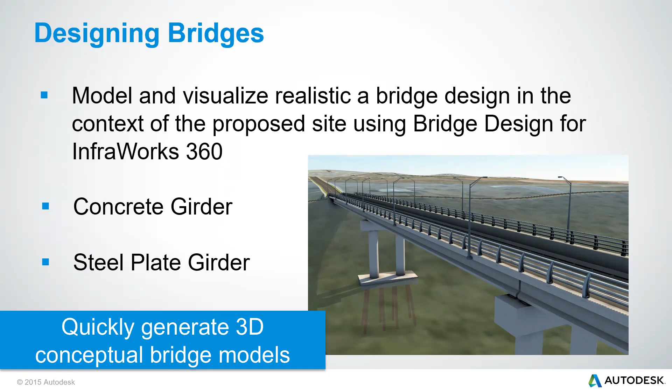You can quickly generate a 3D concept of the bridge with the related structural elements that you want it to have. It is an intelligent way of designing the bridge, where you can easily generate a detailed 3D model based on a typical design that a bridge engineer would want to use, that is the piers, the girders, piles, and even the bearings.

It also allows you to use parametric design, where you bring the power of Autodesk Inventor into your design, to generate and model 3D shapes, particularly where the elements you want to use are not already available within Autodesk InfraWorks.

To edit the bridge is very easy, just a matter of clicking on it and gripping it, and it can automatically adjust. The change that you make on one particular element can easily be applied to any other element that has similar characteristics to the one you are editing.

That is, if you want to model a pier and apply that change to any other pier within that particular bridge model, it's just a matter of selecting and applying, and the shape or property you want will automatically be applied to the remaining piers.

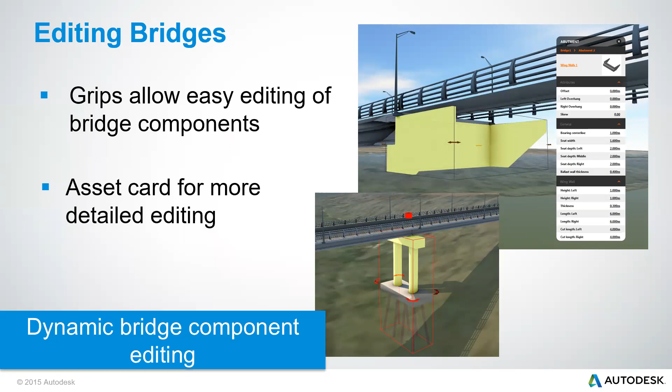You can use the asset card for more detailing and editing of that particular bridge. This makes the modeling of the bridge quite a dynamic way of having it, and very, very easy.

As you model it, you also have to start considering things like the clearance envelope check, that is the overall headroom required, maybe where the bridge crosses over an existing road or railway. It will let you know, for a railway or road crossing, what should be the minimum clearance above that particular existing road.

Once you do that, you can also optimize the design of the bridge using the intelligent tool.

As you do the bridge design, you can also start looking at the quantities required for that particular bridge, just by selecting, and it will tell you the volume of material required for concrete and for steel, both for the bridge overall, but it can also specify for the superstructure, substructure, and that particular element which you have selected.

You can just select view quantities for a girder, one individual girder, or a quantity for the overall girders present on that particular bridge model.

Once you are done modeling the bridge and ensuring the shapes and elements meet the minimum design requirements as per the particular design standard you're using, you can now perform the line girder analysis. Remember that when modeling the bridge, you can also add loads, that is the imposed loads based on the designs you have adopted.

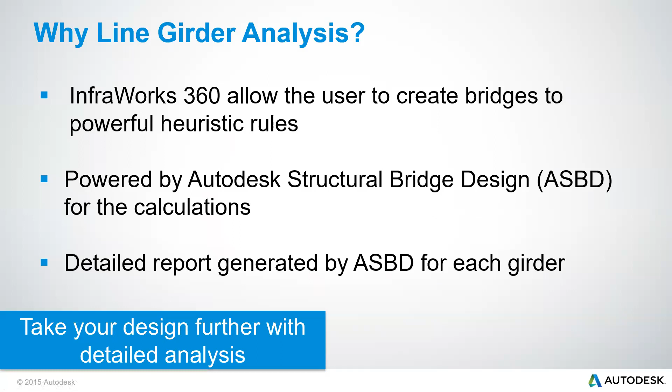So that's just the short presentation on what I intend to do. So I'll now just switch to go into InfraWorks so that we can have a look at how we can do a bridge design.

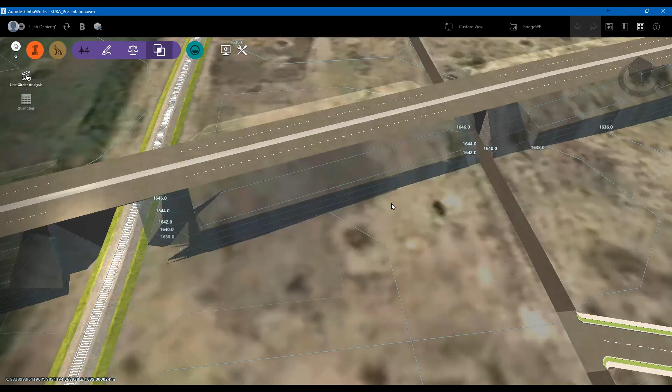So this usually has always been a problem between a structural engineer and a highways engineer, agreeing on the exact bridge model to use in terms of how the bridge geometry will align with the road geometry, that is in terms of the center lines, where you find that during the construction there are usually some discrepancies between the two geometries, especially where the bridge is being constructed by a different contractor from the one which is constructing the road.

To start modeling the bridge is very, very easy. So if it is the road that we intend to do a bridge on, we just need to know, based on the survey that has been conducted out there, where we want the bridge to start and where the bridge will end. So I'll just use some random start and end station for the bridge. Maybe I can choose station 1+675 meters to a particular station of maybe 1+800 meters on the other side. So if this is my intended start of the bridge, I'll just right click.

So I first select the road on which I want the bridge to be done. If I've selected the road, I'll just scroll down after right clicking, and I will see a tool for adding a structure. So there are quite a number of tools that I can add, like I can add a bridge or a tunnel. So in this case, we're only interested in adding a bridge.

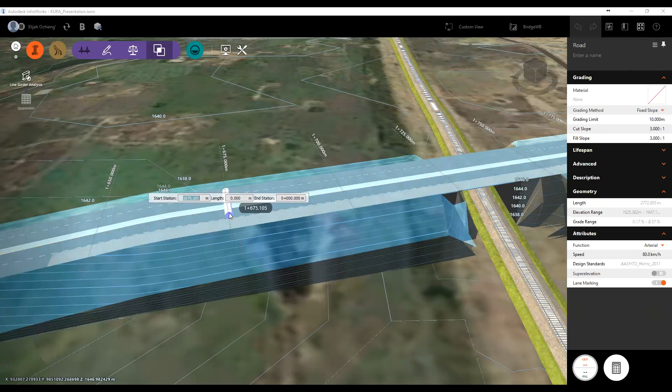And at the end, I will take it towards this other side, maybe at 1+875, so that it can also totally cross over that road there as well. So I'll just click at that particular end of the bridge as well.

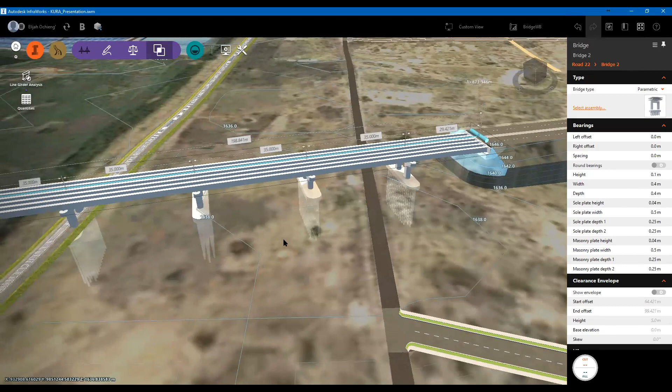So once I've clicked the start and end of the bridge, I'll just give it a few seconds to refresh and synchronize, and it will give me a model of the bridge, as you can see there, with the proposed girders, abutments, piers, piles, and even the bearings, as you can see on your screen. So that's basically what it has given us.

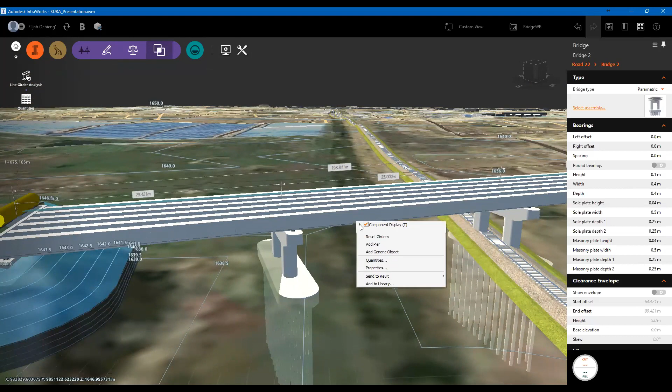It also gives us a deck. Right now I've selected not to display the deck, but I'll just select to show it so that I can have both the deck plus the road on top of it. So it's just a matter of selecting what to display. So I'll select to display both the bridge deck plus the road that is running on top of it.

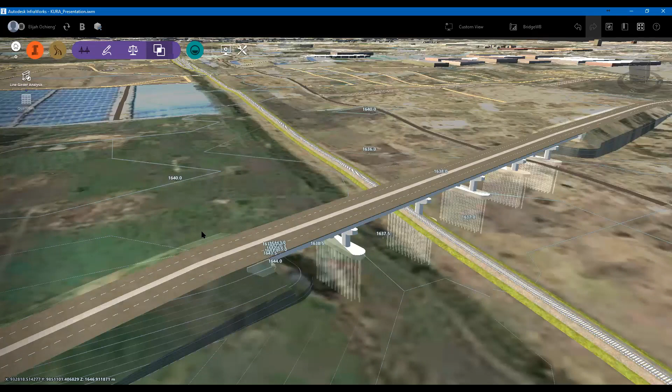So that's how easily I can quickly do a model of the bridge based on the context. So the next thing, after having done it randomly as I've just done it, is to now start controlling the exact start and end of the bridge. So my bridge right now starts at station 1+675.105 meters, but I want it to start precisely at a particular station, like let's say I want it to start at 1660. I'll just type 1660 there and enter.

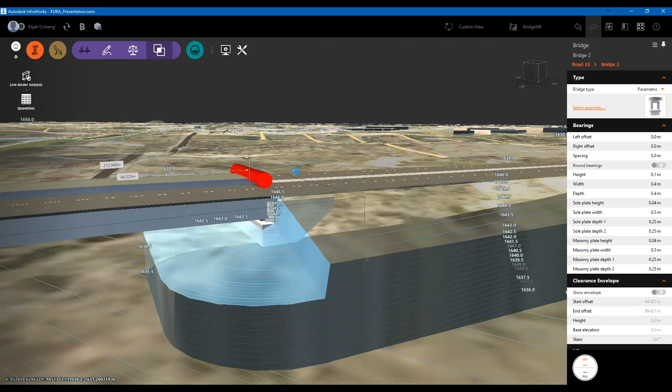So again, it takes a few seconds to synchronize. Then I'll also go to where it ends, to this other side, and also have a precise value for it. So I want my bridge to be 200 meters long. So in that case, I will type this other end to be 1860, because the start was 1660. To have 200 meters long, I will do it at 1860.

So the next thing now, after doing that, is to check which design standard we are using to do this particular bridge. So to check the design standard, it's just a matter of scrolling. And if you scroll down on the right-hand side of the screen, you can see it tells me the attributes. So I can select the attribute, which is the design standard, and precisely the number of piers that you want to use. So if your country uses mainly British standards, that is the BS 5400, you just select it, and it will automatically update the bridge with the minimum design requirements as per British standard.

If you select Eurocode, whether you're using the Eurocode with the UK annexes, or if you're using AASHTO, they are all present here, or even the Australian standard that you can also use. But in this case, I'll illustrate one using the AASHTO load and resistance factor design. That is the AASHTO LRFD.

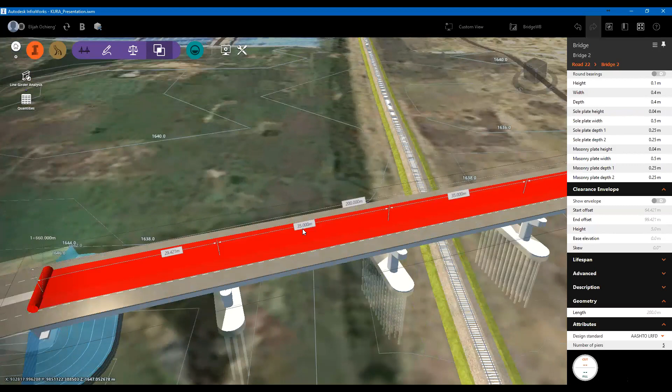So, as you can see right now, it also gives me the minimum spacings, that's the spacing between the piers and between the last piers and the abutment. So right now it tells me that the spacings are 35 meters long. So 35 meters, that will require quite a deep section for the girder. So what we may need to do is to start increasing the number of piers so that we'll be able to reduce the length of the girders, that is the spacing between the adjacent piers.

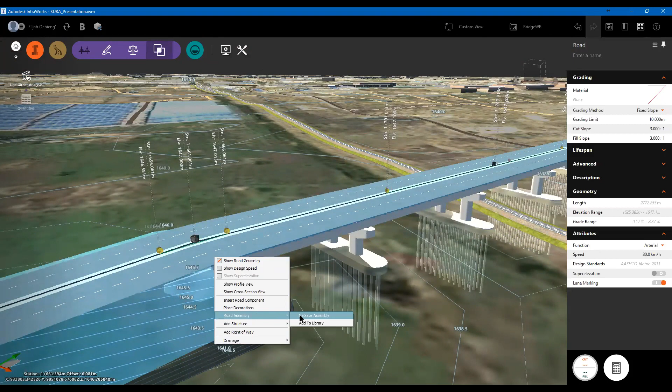Or if there is some proposed road furniture along the bridge, you can just go ahead and add it as well. So I just want to add the guardrails and the lampposts along this particular bridge very fast, just to ensure that we have a complete bridge before I move further. So I'll just right click, and I want to replace a road assembly, to ensure that I have the right assembly at the top of the bridge, the one which includes the lamps, the guardrails, and the footpaths on this particular bridge. So I'll just go here and select. So I want to select a bridge.

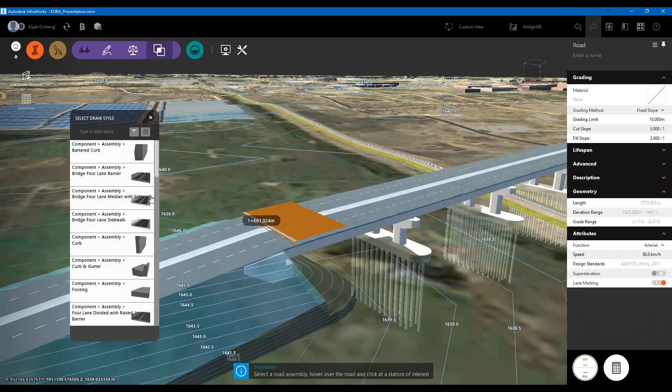So there are already standard road assemblies for the bridge that you can just select, but you are not limited. You can still go ahead and generate your own. As I mentioned, we can use the powerful tool of Inventor to generate our own sectional assemblies as you'd want. So I'll just select a bridge with 4 lanes plus a median with sidewalk. If I select it, I'll just need to select where it starts. So I want it to start some distance from here, maybe 10 meters from the start of the bridge. So therefore, I make it 1650.

That's at the start. Then I'll go to the end and make it end some 10 meters after the end of the bridge. That will be 1870. So I'll just confirm, because I intend my bridge to be 200 meters. So the carriageway with the different road furniture that we require for the bridge should be about 220 meters long. So let me just check on this, and I will drag it to the end where the bridge ends. So the bridge is ending on this opposite side.

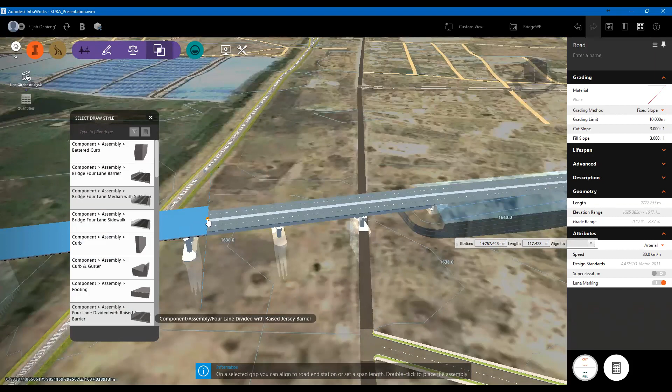So I will type for it 1870 and I will enter. So if I enter, you can see it tells me that for the length on which I intend to provide the different structures should be 220. So if I enter, it takes some few seconds again to synchronize. And it should now give us all the elements that we require for that particular component of the road where the bridge has been inserted.

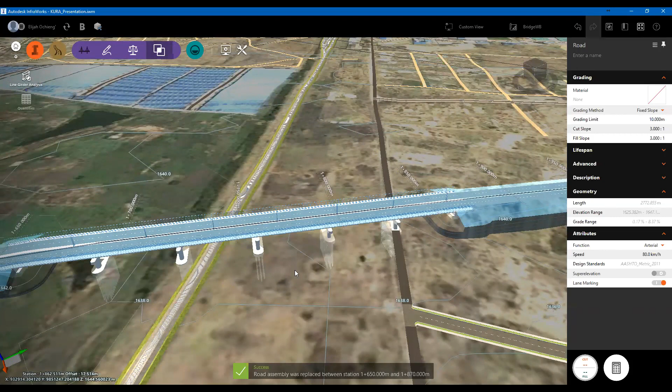So I can just zoom into it, have a look. So my road here, there's quite a steep slope at this particular area though, but if it's a detailed design, you have to ensure that you have the right elevations at the start and end of the bridge. So that's how we can easily change and include the guardrails, the fences, even if I want to introduce a fence just for safety measures, you can easily do that.

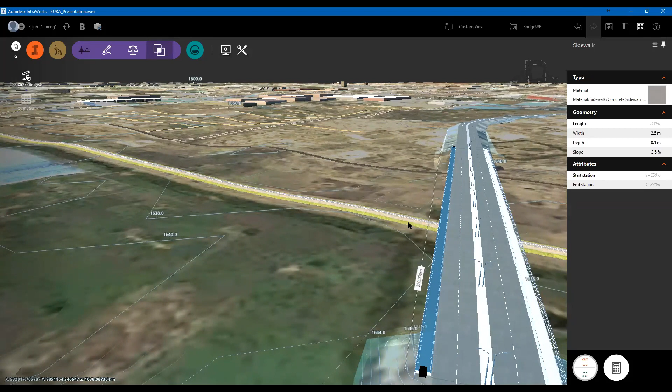So even if I want to now control the length of the footpath that I'm having, the walkways, the width, the depth, the slopes, you can easily do that for that particular bridge. And most important to note is that the slope of the bridge will be guided by the slope of the road in many cases. So even if it's a road which is having a super elevation, if you apply a super elevation to the road, the bridge will also automatically adjust, take up the slope based on that super elevation that you are having.

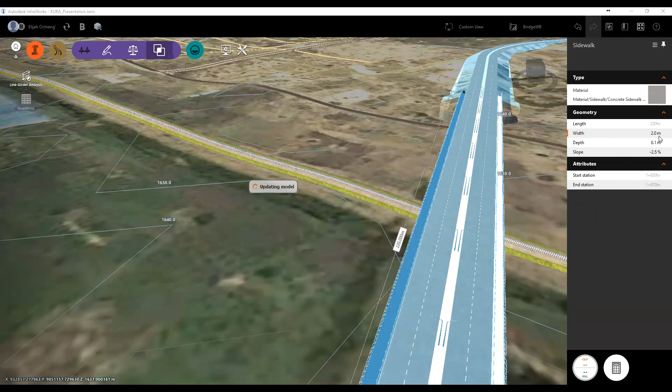So if I want to have a walkway of let's say 2 meters, I just type 2 meters on the width and enter. Then after entering, it just takes a few seconds to again synchronize the change. Then I can also do the same on this other side. So that's basically how you can model and vary the different components of the bridge that you are now having.

So the next thing you can now check maybe is the load that is automatically applied based on the AASHTO that you are having and the class of the road that this bridge is carrying. To check on that, you just go down and select the deck of the bridge. So I want to select the deck, bridge deck. Just go into that position and you can see it tells me this is the deck that I've selected, and it tells me that my deck will be done with a cast in place concrete. It tells me thickness of the deck, the edge thickness. If there are tapered ends of the deck, it also gives me all those parameters.

But what is important down here, it tells me strength of the concrete that is used to do that particular deck as well. So it tells me that the concrete is of class 35 Newton per millimeter square. Then the superimposed load based on the AASHTO that I'm using is 3.0 kilonewton per meter square. Then the wearing surface also, it has applied a thickness of 0.05, that's like 50 millimeters. Even if I have haunches on my bridge, I can also automatically check on this.

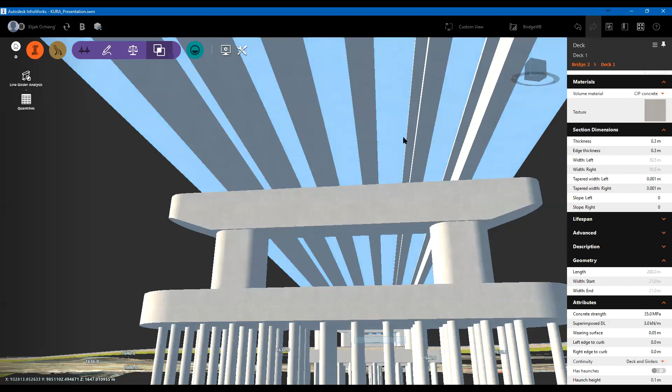Then the continuity of the deck is a very, very important factor. It defines how the supports will be applied, whether you want to support the deck on the piers or just going to be one continuous deck. So in this case, the default one is deck and girders being continuous, which means that at the point where the deck slab meets with the girder, it is going to be one continuous structure. And that full continuity arrangement just ensures that during the in situ construction of the deck, you will have to apply some diaphragm over the piers when the bridge is now being constructed. So that's basically how you can control what you have on the deck of the bridge.

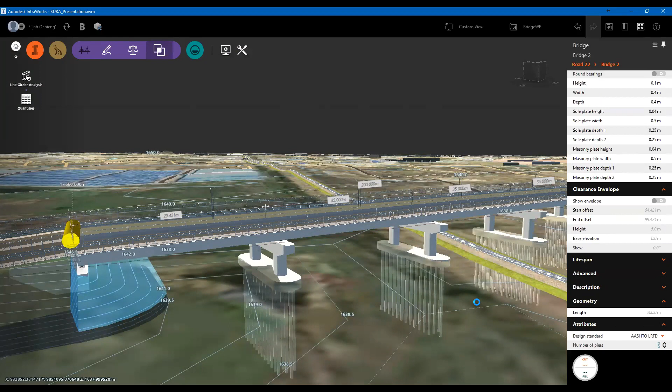So the next thing which maybe you can look at when generating our model still is the exact position and spacings of our girders. So like I said, they are currently spaced at 35, which is quite long and will result in very large and deep sections. So what I may need to do, I'll just increase the number of piers to 7, or let me just use 8, so that we can have a value of less than 25 as the spacing between them. So if I increase the number of piers again, it automatically synchronizes and takes a few seconds.

And when I now check on them, it tells me that the spacing between each of them is 21.87 as opposed to 35. And therefore, that is a good value that you can use, because our sections for the girders won't be that deep now. So the next thing now is we want to control even the length of the column on the pier.

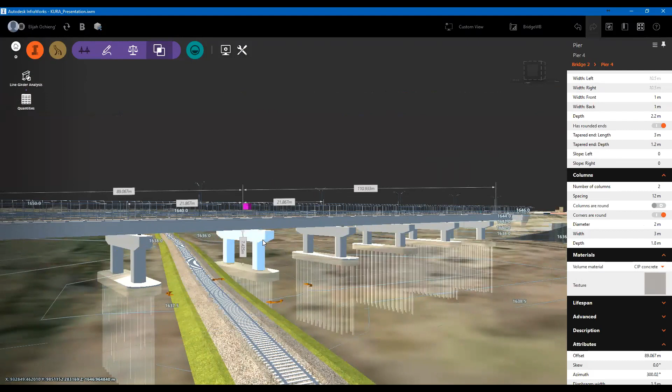It's just a matter of selecting one of them and working on it. So maybe where we are here, we do not foresee use of piles, but the default pier here has piles. So what I may need to do, I'll just select that particular bearing and the pile there, and check on my right-hand tool here. That's the asset card, where I can manage the assets that I'm having.

I do not want to use piles, so I'll just make the number of piles 0 in each of them. But again, whether to use piles or not is informed by the geotechnical investigation on the project area. So I just want to make everything 0, so that I will not be having piles on my model.

Then maybe you'll assume that the hard rock was found some distance below the ground, say 2 meters deep. So I'll just say that the height below the ground for this particular foundation should be 2 meters. So I'll just type 2 and enter. And if I enter again, it automatically synchronizes and changes. That automatically means that the height of the column will also increase.

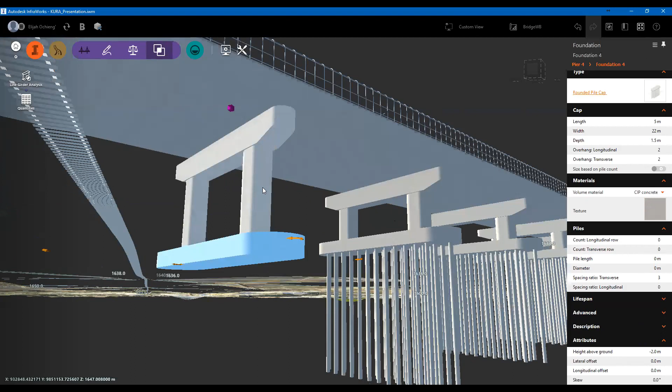Then the next thing is, based on the size of the road that we are having, we may find that the columns are likely to have a greater spacing. Right now, if I check, it tells me that my columns are spaced at 12 meters wide. So I'll just increase the number of columns. As opposed to using 2 of them, I can use 3, and I will enter. Then it automatically changes, and you can see I'm now having 3 columns there.

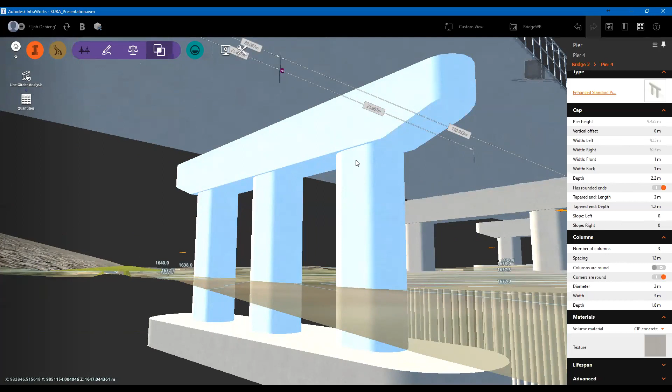So you can go ahead and change each of the elements one by one until you have the exact project model that you'd want based on the design intent. I do not need to do it in all these individual elements for the piers. If I want all of them to take the shape of what I've just done with this particular one, I'll just right click and apply to all piers. We can see they have updated, all my piers are having 3 columns.

Next, since I do not want to use piles, I'll again right click and apply the pier foundation to all other piers in the model. That's how easily you can use it to model the bridge. And as you model it, it's being modeled as per the design standard that you had selected. So you can see right now I only have the piers plus the foundation, no piles.

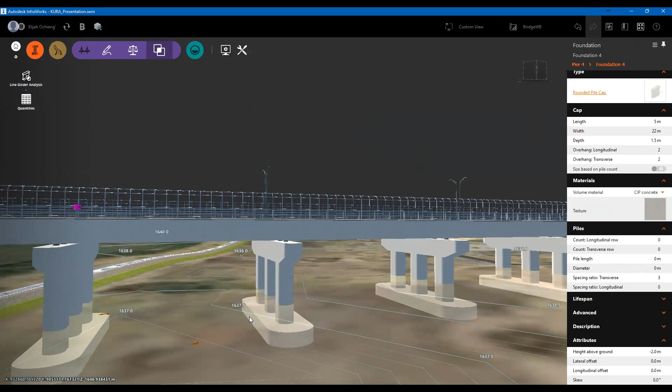The last thing to look at is the girders, which again are guided by the design standard that you chose, because each design standard has its own proposed sections and sizes of the girders. Since I'm using AASHTO, it has automatically selected the AASHTO sections based on the size of the bridge and the spacing of the piers that will be able to accommodate the load that's going to be applied on it.

If I select one girder, it tells me the material properties: the final strength after 28 days will be 55, that's the class 55 concrete. The strength at transfer, that's when you're doing pre-stressing, because it is going to be a pretensioned girder, will be 40. The tendon strength is proposed to be 1860, and the initial pre-stress is at 75%. So it gives you such details based on the particular design standard that you have selected.

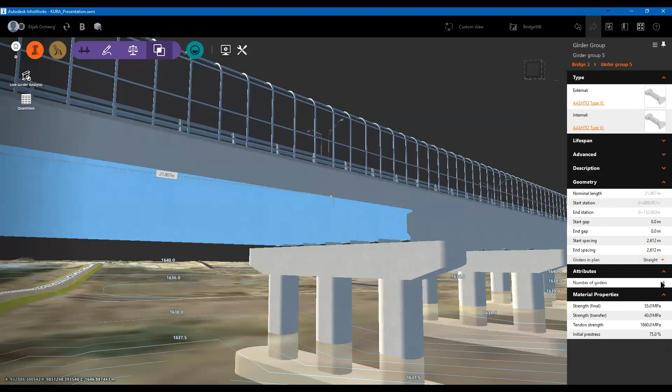So if I want to increase the number of girders based on the carriageway width, I can increase them so that I will not overload each of them. The only thing I need to do is, maybe I want to use 7, I want to use 8 for this. I'll just click and enter.

And it increases the number of them to 8. So the next thing is now to decide on which exact girder I want to use. And again, the choice of this type of girder to use is informed by the spacing, where if they're closely spaced, you can use a lower class or a lower type of girder. So in this case, usually for a spacing of 20 to 30, it's recommended that for AASHTO you can use type 4, or between type 4 to type 6.

So as you can see, the types are all available there. Right now, I've only filtered for it to show me the girders as per AASHTO. But there are quite a number of them. If I just remove the filter, you can see it populates itself, and it has quite a library of different design standard girders. Even if you want to use a box girder, they're all present there, just a matter of selecting. So if I'm only interested in AASHTO, I'll just type AASHTO there, and it filters to display only the ones for AASHTO.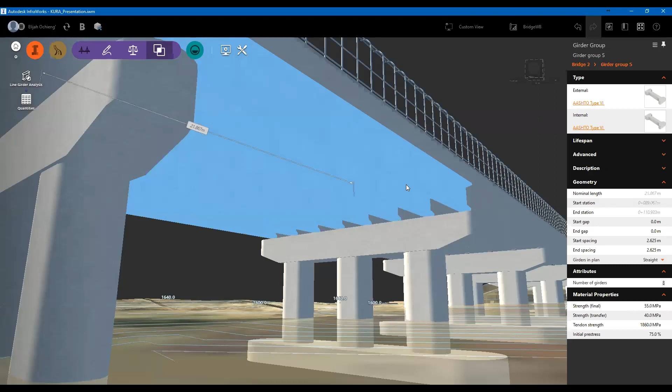So like I said, in this case, we have a spacing between the piers of 20 to 30. So I'll just go for type 6. And if I select type 6, it automatically selects. If I want the property I've selected for these girders to apply to any other girder within the model, I just select and apply to all other girder groups within the model. So that's how easily you model the bridge, as per the design standard that you are using, whether AASHTO, the British standard, and what have you. So right now, that's our bridge.

So the next thing, if you are wondering how you can control the exact location of each pier, it's just a matter of clicking on one pier. As you click, it gives you a way of controlling the offset. You can see that right now, the spacing between them is 21.867. So I just identify the start. It is starting from this abutment. If I select this one here, I can control the exact distance, center to center, between the abutment and the first pier. So if I want it to be 24 meters, I'll just type 24 and enter, and it will readjust itself. Even if it is a skewed bridge, you just need to select the angle to which it is skewed and change the orientation.

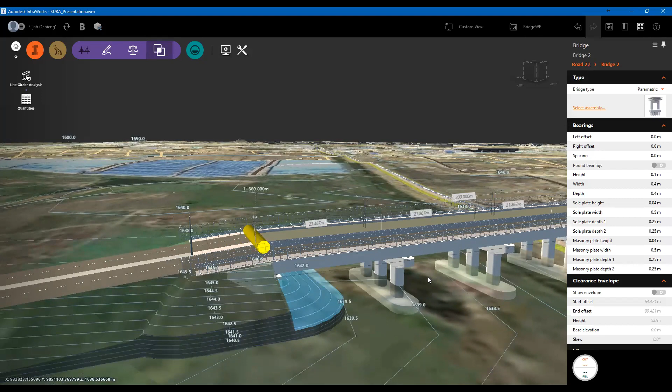The same thing which I've done with the piers, girders, and the foundation is also applicable to the abutment. So I just need to check on that particular abutment here. I'll select it. I need to go below the ground because of my abutment, this is it. If I select the bridge, then the abutment, I can again choose from a library of abutments that are already present. You can choose an abutment with caps plus piles, just a simple abutment, or abutment plus wings. In this case, I'm using abutment plus wings. To change the size and parameters, such as which concrete to use, whether precast, cast in place, or steel, it's just a matter of selecting from what's already present on your asset card on the right.

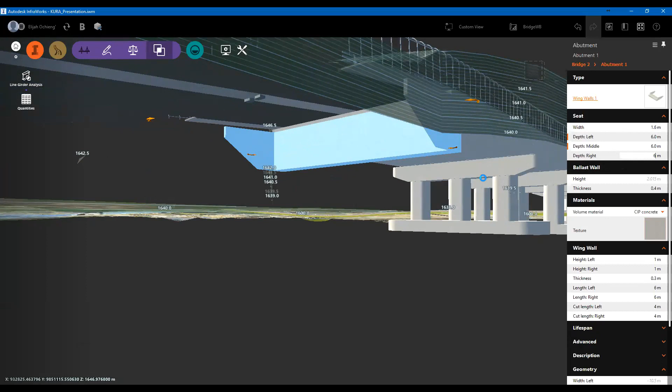So I want it to have a depth of, let's say, 6 meters based on the height of the next adjacent pier. I'll type 6 for right, left, and center, and enter. It automatically adjusts itself. And now you can see it goes down almost the same height as the piers next to it. So I'll just apply that to the next abutment. Okay. So that is it with the modeling of the bridge.

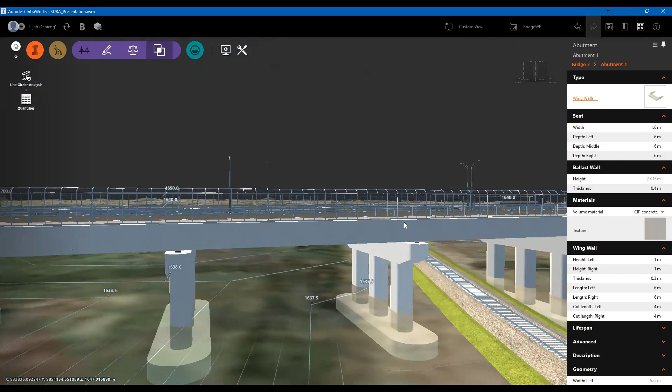So you can see the modeling of the bridge is very, very easy. As opposed to modeling from scratch without the required sectional properties and materials, which would take you forever if done manually, here we model it by just picking from different elements. I was mentioning that you may find you want to use some specific sectional sizes, pier sizes, and types which may not be present in Autodesk InfraWorks. What you need to do is just open Autodesk Inventor. I will quickly illustrate how you can create your own custom shapes using Autodesk Inventor. So I will run Inventor and share my screen for a second.

I want to illustrate how you can easily do this. Let me share Autodesk Inventor. I've just run it. Let's assume you want to create a particular shape. I'll illustrate with one I was already working on, let me just open it.

Confirm to me that you can see my Autodesk Inventor screen. I'm running up a sketch I was making for my required pier. As opposed to using the rounded pier columns, I can just go and sketch this kind, let me just open it, give it a few seconds.

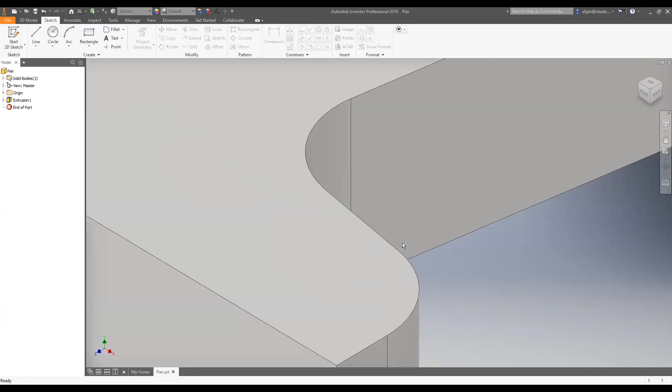Just a minute, I want to go to the sketch, then the 3D model. Let me show how to create a new sketch. What I'll do is go to the origin and select the plane I want to work on, then switch the view by changing the orientation.

Unfortunately, what I want to show is not picking up. Let me just start a new one so I can show you what I intend to show you, by creating a new parametric shape.

Once I've gone to new, I'll select the origin I want to work on, and use that origin to do a new sketch. To do a new sketch is very, very easy. I just want to start by doing a line from here, maybe for 4,000.

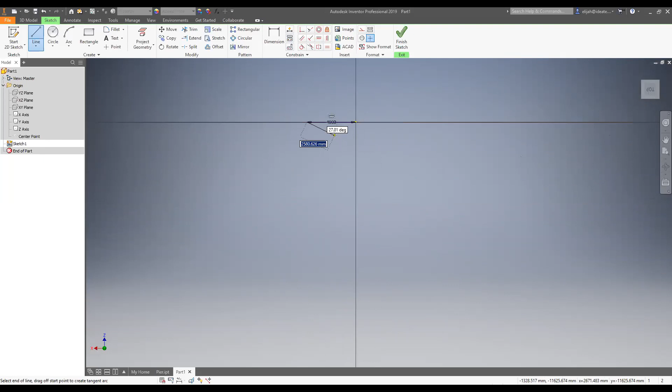I want to create a typical pier as opposed to what I'm having in InfraWorks. I want to create a parametric shape here for a typical pier that one would want to create from a custom section. I want to do it from 4 meters from the center, then form the shape of just one continuous pier with a widening top so it will automatically support the girders on it.

At this particular point, I want it to slope at, let's say, 75 degrees. I won't go precise, maybe approximately 75 degrees. And I want it to have a height of 9,000, or 9 meters.

Let me go back to the screen. XZ, please. Okay, that does not work for me. Sometimes using this Inventor, which is mainly for mechanical models, trying to use it this way may bring you issues.

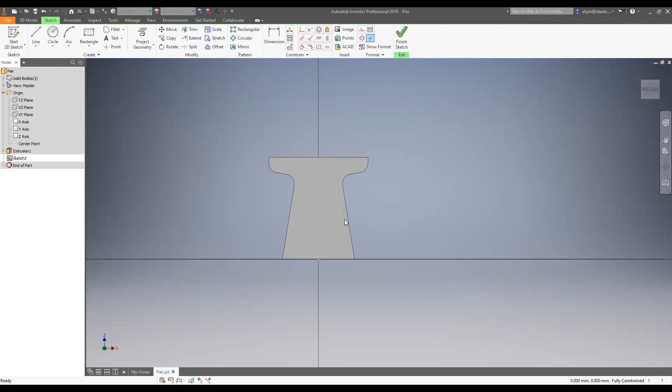But basically what I wanted to do was show how we can create a shape like this, as opposed to using the circular individual columns we apply through the foundation. We can use it to create this kind of model, which we then export into Autodesk InfraWorks. As you export into InfraWorks, it comes with the shapes, and it will be parametric, meaning if you change the height, it automatically adapts and takes the height you are trying to change, the length, the dimension, any dimension you come up with from here, just by sending it.

When you click finish, you can send it and go back into InfraWorks to access and import it among the different elements you have. So that was just to illustrate that, as opposed to using the default shapes and parameters you have, you can go ahead and define your own. That's why you link up Autodesk InfraWorks plus Autodesk Inventor, Inventor just for modeling and creating different shapes that you would want to have.

Okay, so I'll just go back again to share a new screen, that is InfraWorks, so we can continue with it.

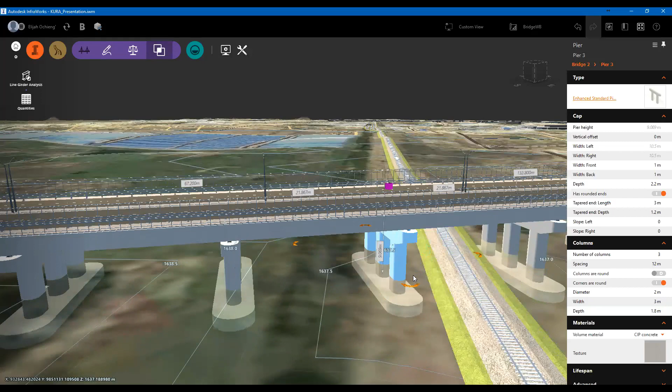So I'll just assume that as of now, our shapes are okay and they meet all our design requirements. The next thing is to now perform some basic line girder analysis and be able to send our bridge into structural bridge analysis and design. So to perform that, or even before you perform that, you may get some overheads in terms of the quantities that you're going to have.

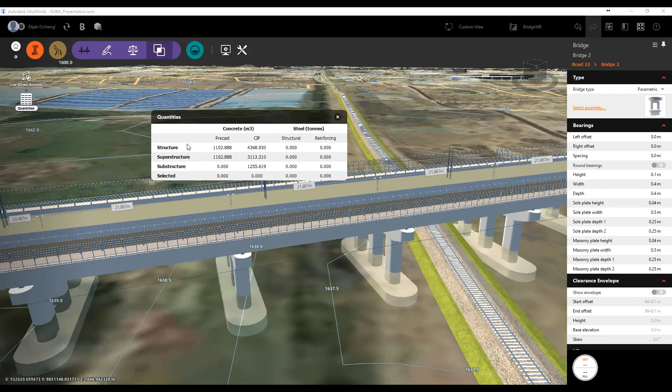The same also with the substructure. As you can see, our substructures were all cast in place, so we do not have any precast concrete. And we do not have any steel element in this particular bridge, and that's why it tells you it is 0. So that's basically to know at least the expected quantities that will be required for this particular bridge you're having. So once you have reviewed the quantities...

The next thing you may consider is to perform a line girder analysis. A line girder analysis is the structural analysis of the bridge based on the loading and type of road on which the bridge is being done, and the specific design standard that you have selected.

So it is a cloud computing functionality, which means you will not even require the processing power of your computer. It's just a matter of loading and selecting the bridge, and it will go online to the cloud, take a few seconds, and perform the analysis using the structural bridge design tools. Once it has done the analysis, you can download and get the data back into your software for further viewing. And if there are any design changes you need to make, you automatically send the bridge into structural bridge design, which is specifically meant for structural bridge design and analysis.

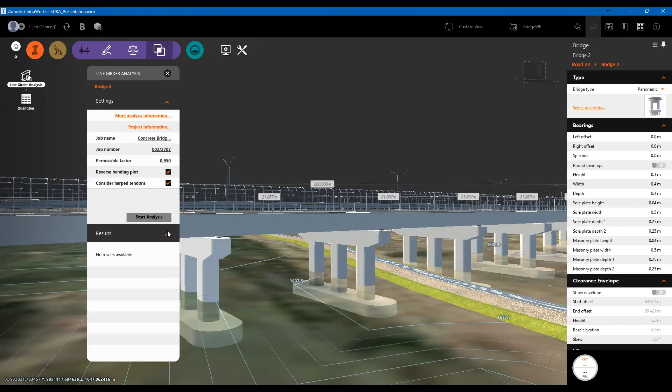So those are what you define as the project information. And once everything is defined as okay, you just click start. It will go online, take a few minutes, and you can generate the result here. Since it takes about 10 to 20 minutes to get the result back, I'm not going to do it live, but I'll just load the one which I've already performed analysis on so that you can have a look at it.

Remember in our previous webinar, we showed you how you can create different proposals. So this bridge which I have not analyzed is in a separate proposal from the one I've analyzed, but they are exactly the same bridges. I'll just go back into a different proposal by switching my proposals tab into the one which has the analysis and report already done. So that's what I'm switching to - it is exactly the same bridge.

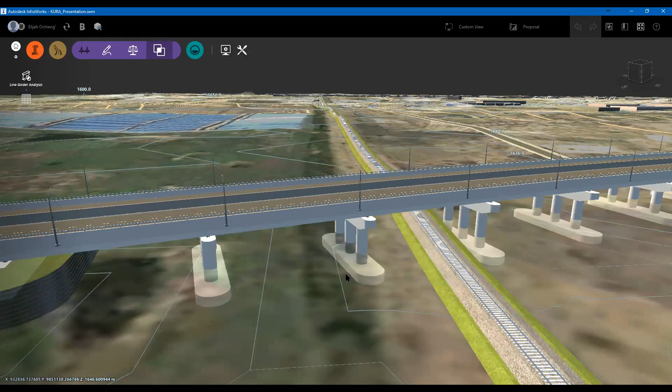This is the one I was working on previously, which has the analysis results already downloaded, to minimize time. So if I select it, I can just go into my line girder analysis, and you can see it tells me the analysis is complete.

And the girders which were analyzed are 49, and the girders which satisfy design requirements are also 49. So that means that all the girders that I analyzed meet the minimum design requirement.

Okay, so maybe I can just have a look, I will turn off the bridge deck and the road on the bridge so that you can look at the girders only. That's what I've just done.

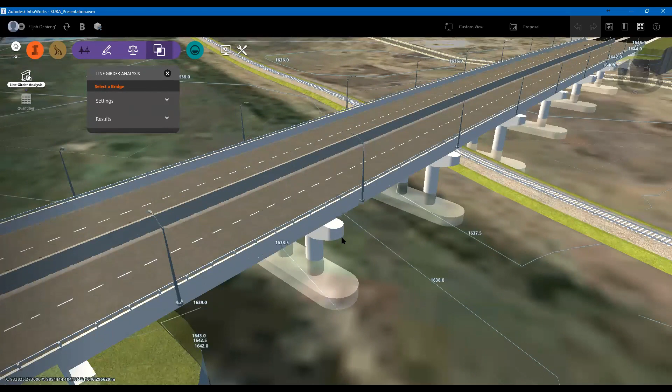So if I select right now, just a minute, let me select the bridge again. So you see right now, if I select the bridge, these are my girders, that's how they are spaced. I've just turned off the display of the bridge deck plus the road on it and other road furniture, so I'm only looking at the structural elements, that's the piers and the girders plus the abutment. So you can see right now, these are the girders.

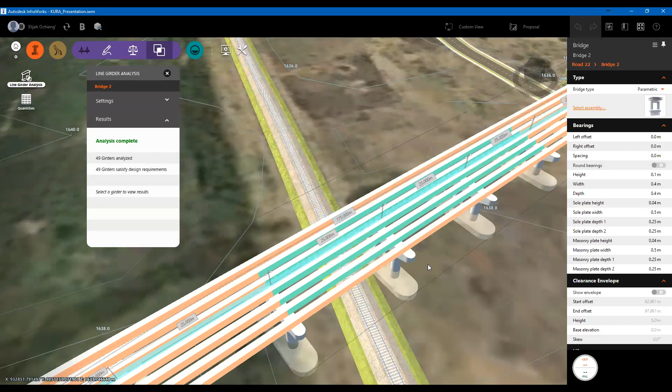So the girders which do not meet the minimum design requirement based on the design style you've chosen will be in red. The ones which were very satisfactory, which met the design requirement very well, meaning they were far from failing, will be in green. And the ones which were just about to fail but did not, because they met the design requirement, will be in this particular color you are seeing here. Is this color? I can't say this color, I'm not good with colors. But I know it is a color displaying that they were just about to fail, but did not.

When it's now performing its service, you can see the pre-stress transfer, if you perform analysis for the pre-stress transfer, erection stage, the live bending strength 1, live bending service 1 against 3, you can see the shear, the construction stage, because those give you the sequence through which the bridge should be constructed. So it means that if you're performing construction stage analysis, if maybe it is partially loaded, how will it be affected in terms of loading? You can see that the ratio is very, very low.

Okay, so basically that's how you can get the report, and you can see it tells me I can get a full report. The full report will be a detailed structural analysis report for that particular girder, where we'll be able to see how the calculations were performed to arrive at these particular ratios shown to us right now here.

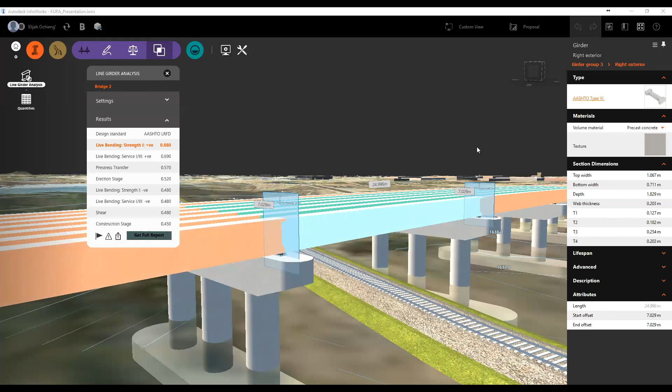So if I want to access the full report, I'll just click get full report, and it will open it in a PDF report. I will just switch to share my PDF viewer on which the report has been opened. Just give me a few seconds, it will take some 1, 2, 3 seconds to open up. Let me make it full screen. And then that is it, let me share that PDF.

It is this one, so you'll see how detailed a structural design report it gives you for the girders. You can see it starts by giving me the company name, the job, concrete bridge design, dates, the calculations by, checked by, project name, data file.

Okay, so you can see it gives me even a table of contents of what is in that particular report. It tells me the content is for girder design summary, girder design calculations, the transverse live load distribution factor calculations, the analysis load envelopes, the analytical model data.

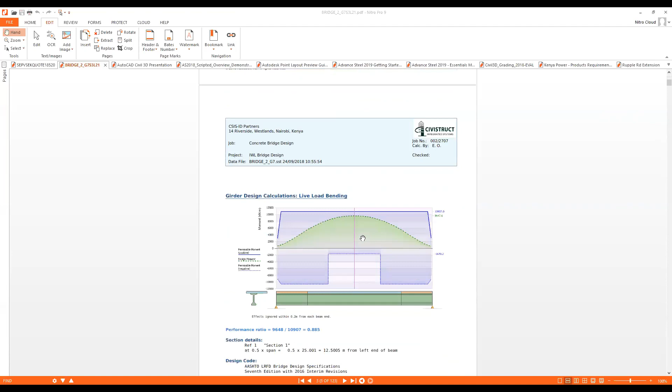So you can see it is very detailed. In the girder design summary, it gives you the different structural elements, that is the reinforcement on the deck, the tendons required for the pre-stressing at the girder, plus their exact locations within that particular girder you have selected. The moment diagrams, the shear force diagrams, the permissible moment, the design moment, permissible moment negative, positive. So it gives you quite a very detailed report that you can see and even use for approval purposes if there is need.

So we can discuss this at length, maybe in another webinar where we just focus on how this particular report is generated, but I promise you it will be very, very hectic if you have never designed a bridge. So it's very detailed, step-by-step calculations, which show us the ratios that you are using to show that the bridge passed the analysis.

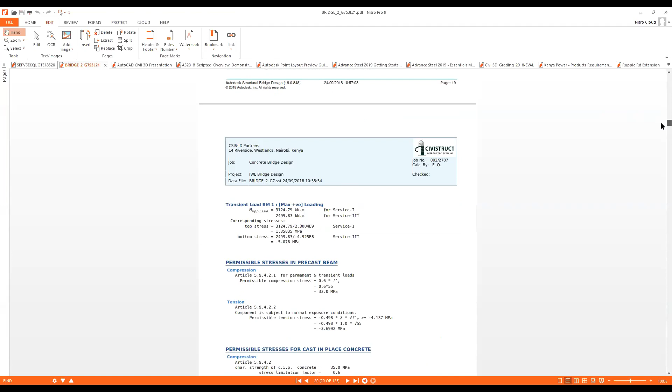So it is now illustrated to us in this report how they were calculated, with the specific clauses from the AASHTO that were used to perform those calculations. You can see here, for the permissible stress in the precast beam, for compression, it tells us the article from which that calculation was derived. That is article 5.9.4.2.1. The permissible compression stress is given by 0.6 times the strength of the concrete. It gives you any detail that you require.

So those who have been doing the design of bridges, I'm very sure you are all conversant with that. But if you now want to vary those design results, it's just a matter of clicking and sending this bridge into Autodesk Structural Bridge Design. So I will just share another screen to show you how we can easily send that bridge into Autodesk Structural Bridge Design. So it's still on InfraWorks.

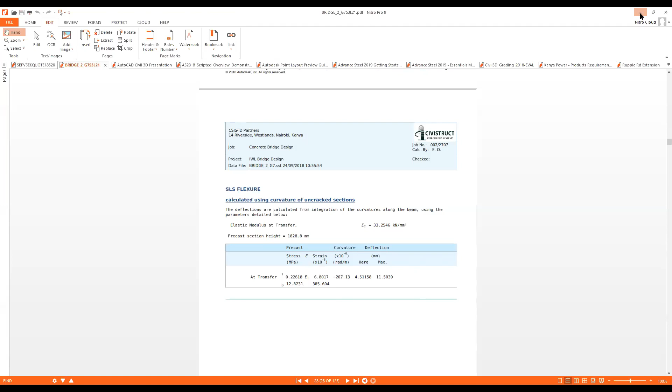So we have seen the report, but if you want to make changes, review the report in detail and even generate customized results, you send your model by opening it in Autodesk Structural Bridge Design. So I'll just click Open in Structural Bridge Design, and the interoperability is very fast. If you just click, it directly links you to that particular software to view the element you're talking about. As I've clicked, it takes a few seconds to open. It opens the bridge itself with all the girders, the piers, the abutment that we have.

At first it will show it to you in the analytical model. Structural engineers are very conversant with this. This is the analytical model of that particular bridge we were seeing. When you're talking about structural design, these are the models that you talk about, not the one we were seeing in InfraWorks. That just tells you the level of detail that you can have with structural bridge design. And of course, the first thing we do,

okay, I think my screen stopped, so let me just share it.

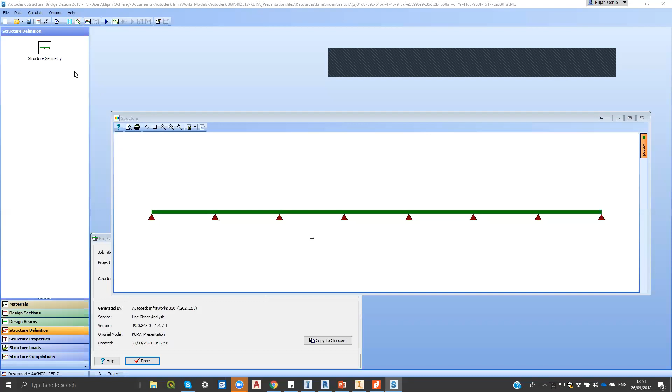Okay, so this is my bridge model, the analytical model in Autodesk Structural Bridge Design. You can see it's a very simple software, but very detailed in terms of designing bridges. Maybe we'll take one of the next webinars to go through it. You can see here it also has the different design standards and codes that you can use, from British Standard, Australian, AASHTO, Eurocode, and even the Eurocode with the specific annexes that are common: the French, UK, Swedish, and Irish. But I will not look into those.

So what is important when you do that kind of workflow, where you directly link the bridge in InfraWorks with the structural bridge design, is you now have more control in terms of being precise with the loads, because in that case we were using the default loads automatically extracted from the design standard. But as an engineer, you may have to use your judgment to start varying them based on the actual execution of the project. And therefore you can now start viewing things like the loads and the materials that were used.

It tells us the material used for this particular bridge, the cast-in-place class 35 concrete, and gives us the exact and precise material properties: the maximum aggregate size, the correction factors, the coefficient of thermal expansion, the modulus of rupture, the Poisson's ratio, the shear modulus, and all of that, which we could talk about forever if I were to go into them in detail.

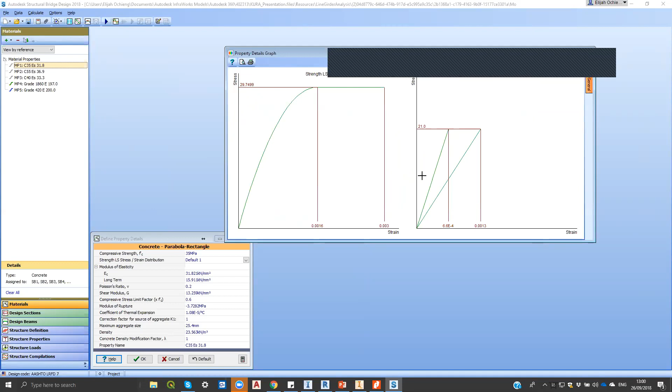It's not plastic. So that's how you can look at each and every element material which was used in this particular model. Even for the steel that was used, you can view the properties there. Even for the tendons which were used, it tells you each of them, the reinforcing steel and the tendons that are present there. So the next thing after that, you can now start looking at the loads.

So you can just select one particular beam which was present there. It gives me the sections, the construction stages, which elements will be constructed first after having done the girder. How should you now approach the construction of the deck, from which side in terms of the support? Because we know that when you construct the deck, it applies a construction load, which will obviously cause some problems. And therefore, you have to know how those loads will be transmitted to the piers during the construction.

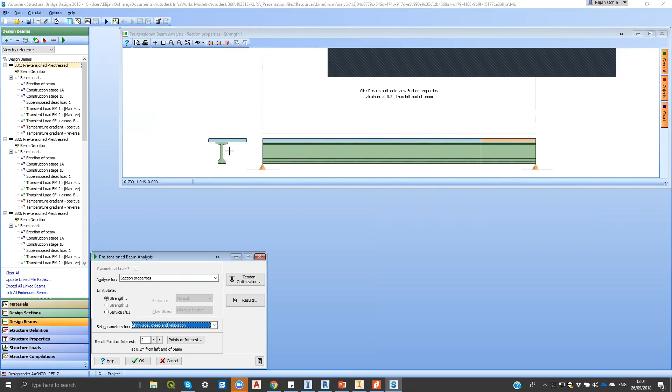So I'll just look at one of the loadings and how we can also control and remove excess tendons where more were provided. So I'll just go and apply analysis on it. And you can see it gives me this detailed sectional view, where I can see how the particular deck will be done based on this particular girder that I've selected. So if I select here, I can now see the tendons by sliding it across the girder, such that if I'm towards this end, you can see on the top of the deck there is no reinforcement.

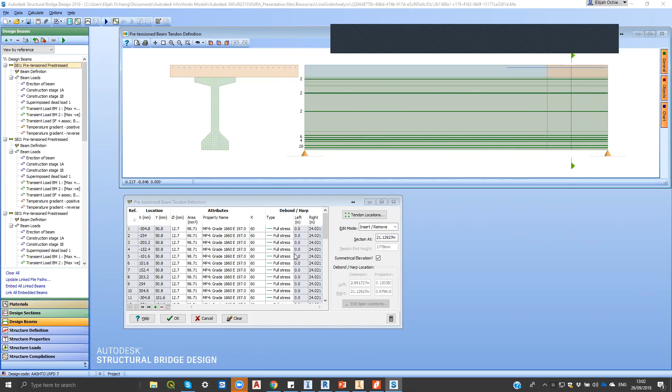So we know, of course, towards the center you're going to be under compression, so we only provide reinforcement at the top at the support of the girder. So I can just slide it back to where it was, so we can see the reinforcement, and it gives us the details, the sizes, the diameter of the tendons which were used. So even if there are tendons that you want to remove, if they are excess, after having varied the loads based on your judgment as an engineer, you can now get those details in depth from Autodesk

Structural Bridge Design. So you can add or remove tendons from here for that pre-stressed girder that we are having here. So that's just going into details for each of them. Maybe that will form one of our webinars where we focus specifically on how to change the parameters from the analysis that you have got from Autodesk InfraWorks. So I'll just click OK to close that without changing anything.

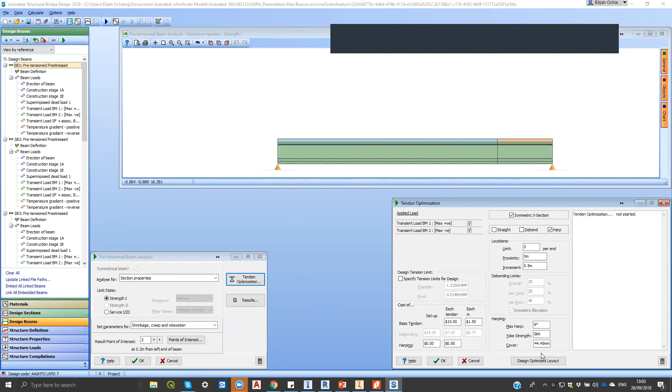So if you want to optimize the tendons, we just want to do optimization without changing anything so that we'll use the optimum design. It's just a matter of clicking; it performs the analysis by itself. And if there is something you may want to vary for that optimization in terms of the proximity to the end and the bottom of the girder, we just click and select there, whether we want to apply debonding, harping, or just straight. So in this case, remember we are using harping of 75%. That's what it automatically takes from here.

So then we can go and check the design layout from the sectional view here, where it applies the tendons one by one, each at the precise location. So that's what optimization means here. It will optimize and give us the most optimum design and distribution of the tendons on that particular girder in conjunction with the deck that it is going to support. So I'll just click OK, maybe just to end it there.

So even if I want to access the individual result for that particular girder, if I'm trying to abort it, it's not finished. Since I've already started running the optimization, I may just give it a few seconds to finish. But let me just abort it because it will take time, and click OK.

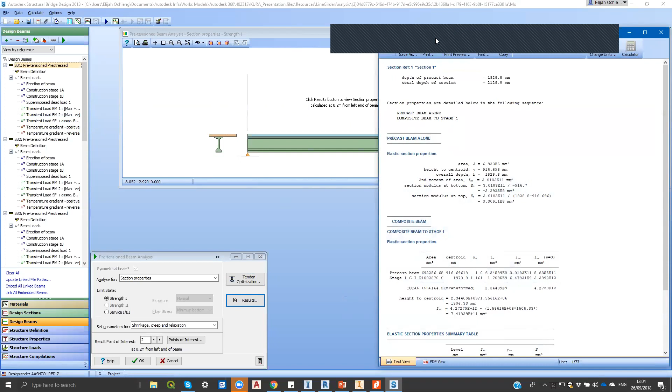So if I want to access the result for that specific girder as per the load that I've selected, remember I selected the transient load for beam 2, I'll just click result. And I don't know if you can see the result. So in case you cannot see, let me just go and select it.

So this is the result that it generates. Assume you can see my result viewer for beam analysis. So this is the result that it compiled into one PDF and sent to us. In this case, after having run optimization, I may still have to make some changes on it. Okay, and it gives me these detailed results.

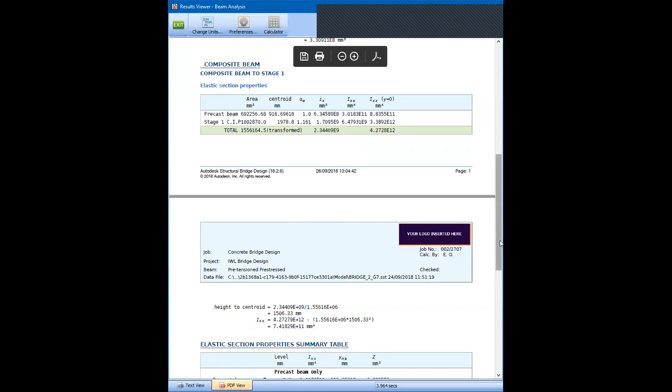I can either have it in the form of text or in the form of PDF just by clicking here, and you'll create a PDF result from it. So you can see if it is PDF, you can even now add your company logo and all those. So basically that's the kind of result we downloaded from InfraWorks directly. So basically that's the detailed design.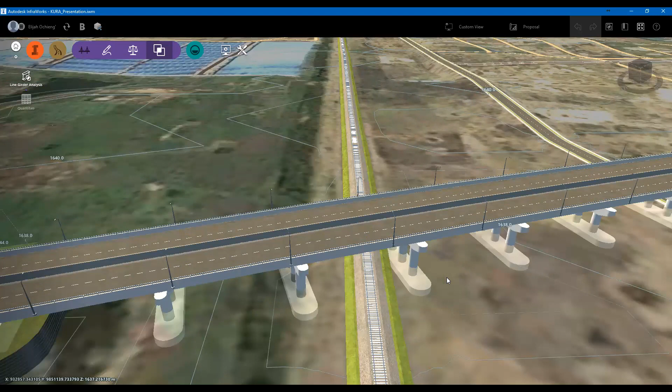If you're talking about now the detailed design, I'll just stop that screen, go back into InfraWorks so that we can finalize. So back in InfraWorks, we assume now our bridge is at the final design stages. You have changed everything in a structural bridge design. So the next thing is where you now send the bridge into Revit for the final stages, that is doing the reinforcement as per the design you have got in the structural bridge design, so that you can do the documentations and the plan production.

So to do that, it's just a matter of selecting the bridge. If you select it, right click, and again, there is an option of sending it into Revit. So to send it in Revit, you have three options. You can start a new project, so you can see there is an option for creating a new project. And then there is also an option of opening a Revit model.

So it means if there is an existing bridge you have been doing, and we have just made some changes on it, I don't have to create a new project every time because they are automatically linked up. So like in this case, this is one I've already worked on, so it's just a matter of clicking to open it in Revit, or if it's a new project, I just click to create new. But if I do not want to open it in Revit, I'll just click to update. Which means that it will automatically update the design changes we have made without you having to do them manually.

Okay, so I've already opened it up in Revit, so I'll just share my Revit screen so that we can have a look at it. Revit should be somewhere here. So let me share a new screen. Show all windows, Autodesk Revit. So I hope you can now see my screen. So here's the same bridge, now brought up into Revit.

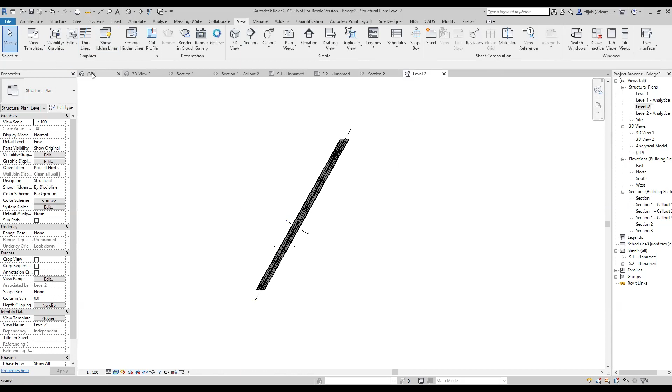So I can go into its 3D view, go home. So this is the same bridge. It automatically brings it up plus all the structural elements that you are having. So the main aim of bringing it up in Revit is just to now do reinforcement and start doing your documentations. Okay, and the reinforcement you do here is also done in 3D. So, because of time, I'll just illustrate briefly how you can do reinforcement.

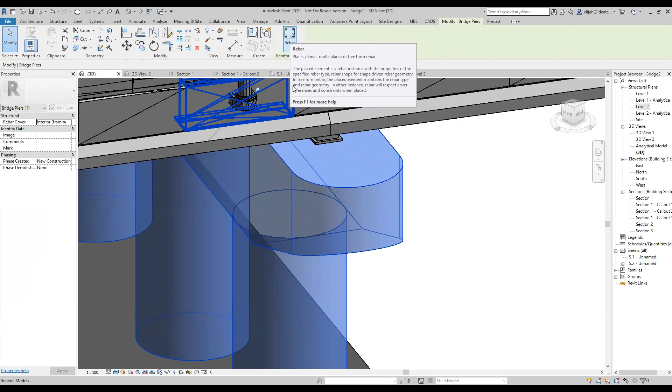So just select one particular element you want to do. And as you select it, you can see there is a rebar here. But remember, the rebar you will be doing here will be guided by the design results that you have customized from the structural bridge design, as you had seen, where you are sending the model from InfraWorks to structural bridge design for detailed analysis. So if I click on that, I do not want to save it.

So the first thing it will do, it will give me the different alternatives of modeling the rebar. So there is what we call the freeform rebar. I can sketch rebar or place it as per the faces that I'm having. And also, it's important to note that based on the design standard you choose, like in this case, since I was using AASHTO, it has automatically selected the rebar design as per AASHTO. So that is usually the ASTM.

So you can see there, it tells me that the material for the rebar is ASTM, and therefore it defines the diameter of the rebars and the strength grade of the steel used for those rebars. So since I was using AASHTO, it automatically selects an equivalent of that in terms of the rebar detailing. But if I used BS or Eurocode, it would have given me an option of using BS 8666.

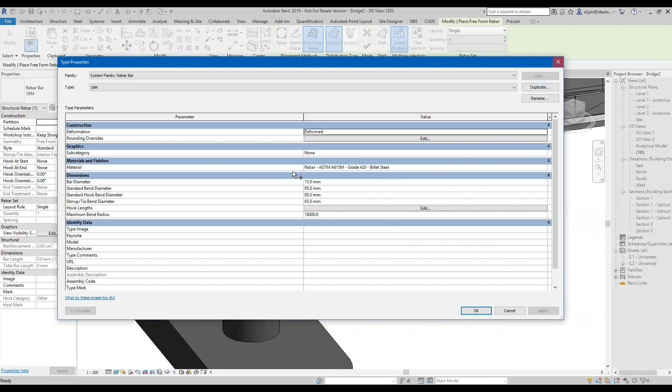Okay, so that's basically how you look at it. So you can see that from this particular design standard I've chosen for rebar, these are the various reinforcement diameters that I can have, starting from diameter 10, 13, 16. So if it was a BS, we could have seen starting from 6, going to 8, 10, 12, 16, 20, up to 30, going through up to 50 something. So they are all present there.

And also it is important to note that they are usually up to some shapes. So the shapes, I think I'll be able to control the shape once I've placed one rebar. So I just want to briefly place some rebar here. So I'll just select the faces on which I want to place this. Okay, let me just use this foundation here. So I'll select the foundation plus this, plus this. So I'm selecting the faces on which I want the rebar to be placed.

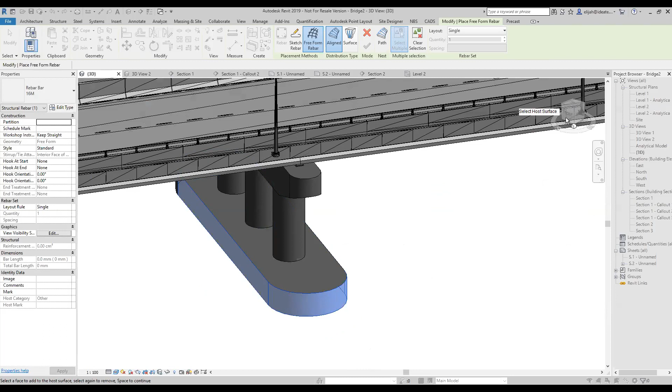So that's using the freeform rebar modeling. So there's quite a number of alternative ways of doing the rebar. So I want to spin it so I can look at the other side of it, because I want to apply it automatically to the remaining face. So I'll select this face as well. And select that at the end there. Then the bottom face also.

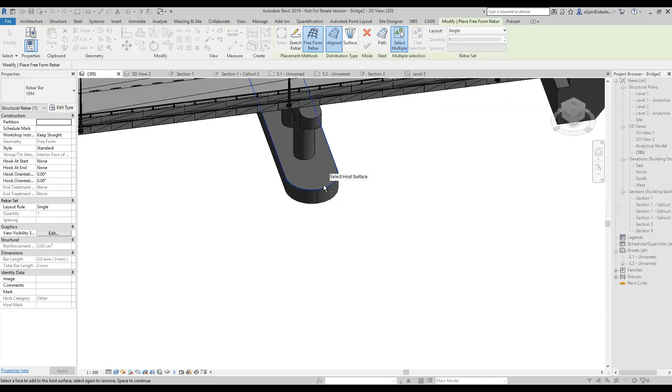So that's the freeform sketching. So I'm just placing the sketches of the reinforcement first, then I can edit them later. So then I'll select the direction through which I want them to run. So I want the rebar to run in that direction and click enter. Then I can finish. So if I click finish, I don't know why it is not placing them. It's asking me to repeat that, because I didn't select something right.

So let me select this again. I can select that end there. That's the bottom one. Enter. Then I can define the path of the reinforcement. I want it to run through the bottom line, going that way. Then I can click finish. Okay, it's not working for me there, but you can see in this one here, I've automatically done the reinforcement. And when I do it, it tells me the spacing of the reinforcement, the number, just using the freeform sketching.

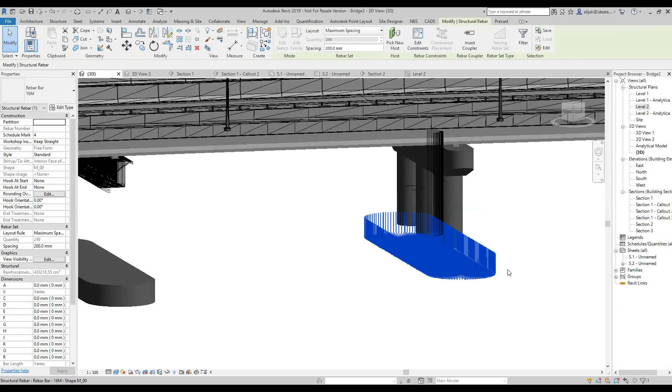So that can take me time because I have to also customize and know even the exact shapes and codes that I'm using for that particular rebar. But it's just a matter of selecting and clicking on that particular one and doing them in 3D. And as you do them in 3D, you can automatically do the bending schedules just by going to the bending schedule to create it there. But that can take time.

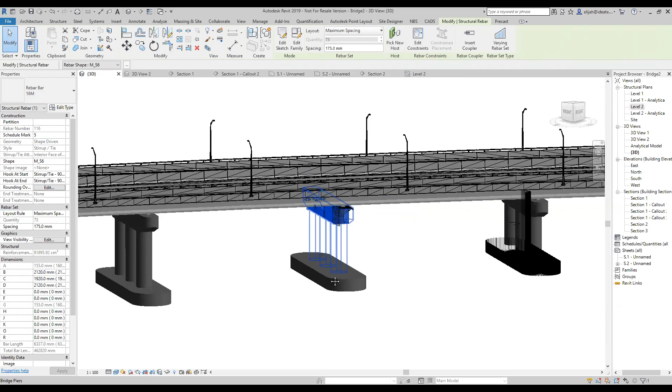So you can see I was placing some random ones also on this particular pier, the column head, and it tells me again the spacing and the number. And if I want to define them further, I can choose the type of reinforcement to use, plus even whether to have things like hooks at the end. Basically now you're supposed to be guided by the design that you have got from the structural bridge design in detail. So that's just briefly how you can easily do reinforcement.

To do the plans, you can cut the sections and have the sectional view. So this was the one I was trying to place the reinforcement on from a sectional view I've cut. So you cut the sectional views. You can have as many sectional views as you want. And like this as a typical callout for the girder. So if I want to draft it to provide the details for the girder in terms of the dimensions, I'll just select to dimension it.

So it's very, very easy. Dimensioning in Revit is very easy. So I can just select and dimension that by the faces that I'm having, doing it very fast as opposed to drafting in AutoCAD, which is usually very manual.

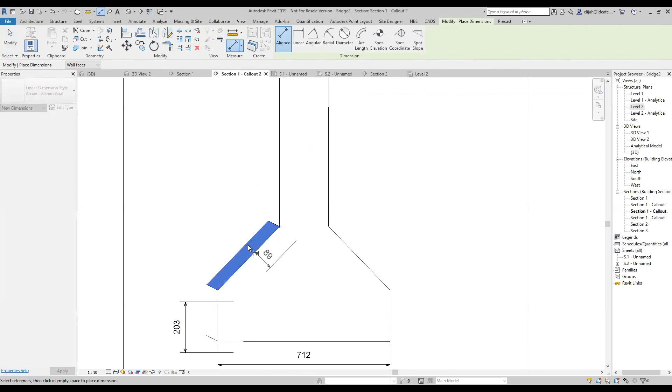So I'll just select that and provide the details based on the materials or the elements that I'm having. So I want to do that to show the edge distance from that overlap there. So basically that's what you do to provide the reinforcement and the details that you may want to have. So I have several sectional views that I've cut, with the one showing the reinforcement I was placing.

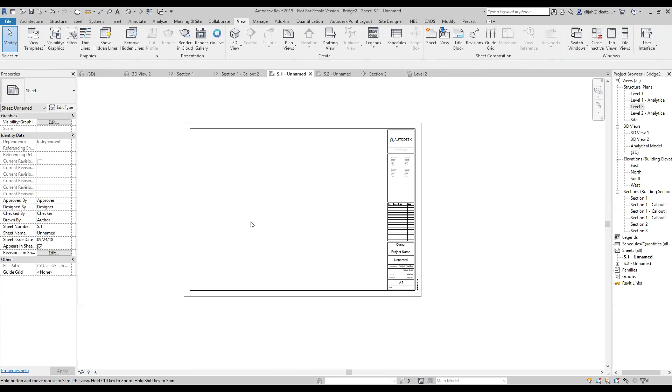But of course, for a detailed project where you're doing the project in detail, you need now to provide for each of the specific elements that you are having on that particular model. So those are the various views that I'd made earlier. And if I now want to produce the plans, it's just a matter of selecting the plan that I'm having, and I will drag and drop the different elements that I'm having into it. So like the callouts that I've made, I can drag and drop into them.

So let me open the sheet. This one I was already playing about with. So this could now be the work of the draftsman. As an engineer, your work will maybe end at the structural bridge design. So cutting the section and providing the details here is what the draftsman, or the CAD detailer, will now be doing, just by cutting the different section views, populating them on the right sheet as per your company templates that you can easily generate from here.

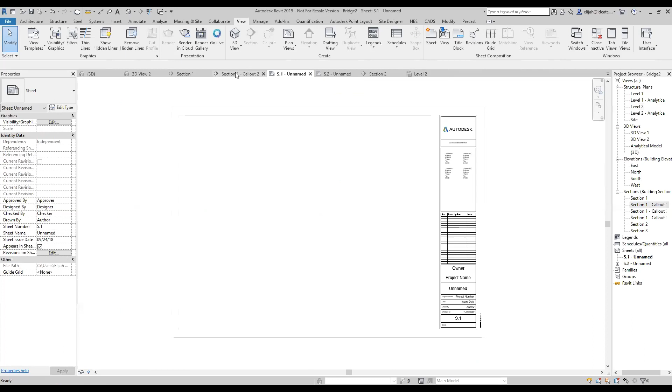So basically that's what I intended to show today. Because of time, I will not be able to go in details because I'm already past the time that was intended for this particular webinar. So at this point, I'll just stop at that so that we can take questions. So we can take some 1, 2, or 3 questions.

Yes, Elijah. We've got one question from engineer Abubakar Lawal. She's from Nigeria. Her question is that InfraWorks only has girder bridge options. What about other options like span bridge, slab on deck bridge, cable stayed bridge, etc.? Okay, that is what is available as the default parameters. Those are the commonly designed bridges.

So if you want to do cable stayed bridges, like you saw me trying to model some parametric shapes in Inventor, you use Inventor to model them, and then to incorporate the elements in your bridge for design, you import it into InfraWorks. So customization is very possible. You can generate them either from Revit, but preferably for infrastructure, it's recommended that you generate them from Inventor. You can do any parametric shape that you'd want to generate.